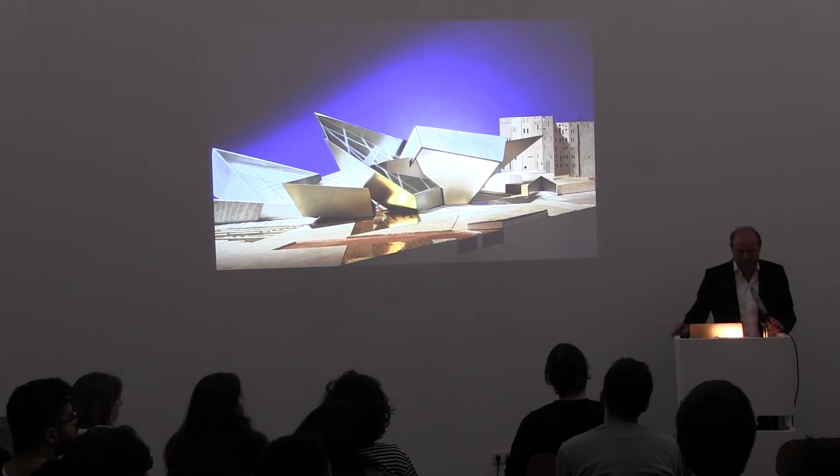Since I studied at Columbia, I studied with Hani Rashid, Greg Lynn, and Jesse Reiser, basically all experimental architects. We did movies, we started with Maya and scripting already at this time. What was very interesting is that Jesse Reiser at this time was a very experimental architect, considered a digital architect, but he couldn't even send an email.

We did this project in Denver, so that's what I modeled. We basically modeled everything by hand first, we did wax models, and this is what I really learned there—architecture is still an art where you sculpt, where you model, and where your eye is important. Whatever you create with a computer, through scripting, through generating by accident, you should always trust your eye and ask: is it good, or is it good because the computer generated it, or because you like it? That's really what I learned there.

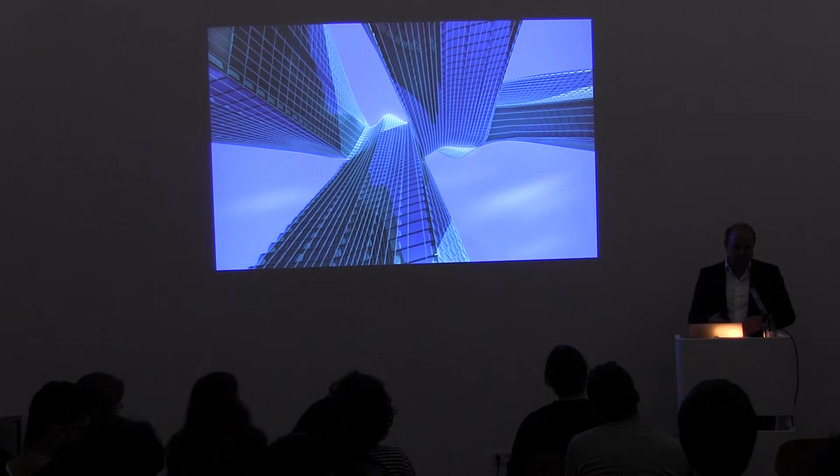So I really encourage everyone to think about modeling, about the basic art. Since Staedel is an art school, you have a lot of different topics, and I think this is a very good thing to keep in mind.

This was very interesting, working with United Architects, with Ben van Berkel, Greg Lynn, Jesse, FOA—like all the people were together. You'd think that highly talented people create amazing design, but this was the outcome, which was, I think, for us... That's also a topic—you really have to be able to work together.

But this shows the Angewandte is a really experimental school. I don't know if someone has been there recently—they built something completely different, just a small renovation and a small extension. And this, I think, is very sad.

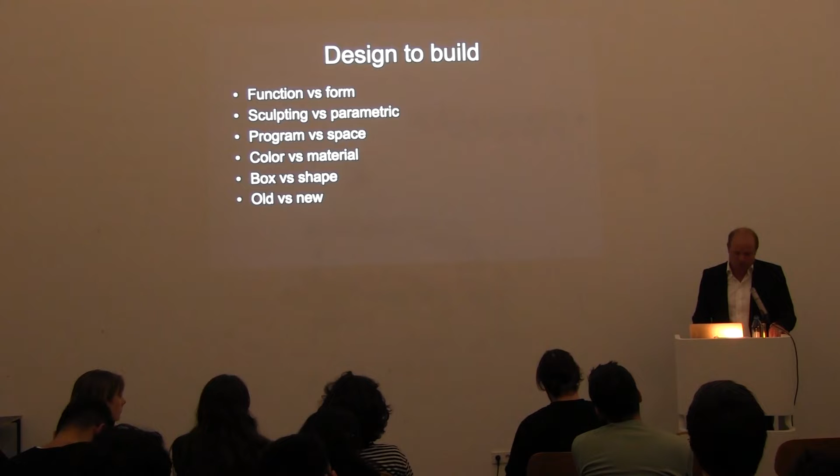So I'm going to show a few projects. The first one is in Russia, outside Moscow, in the former capital of Russia. It has 47 churches and nothing else, and it's a UNESCO World Heritage Site. It's like Rothenburg ob der Tauber here in Germany, and nothing modern has been built there.

So the client wanted something traditionally small, and we had a more conservative building, then we also decided to bring a landscape. It's a sports center—he wants to bring tourists to his hotel. We showed it to the governor, who was an old communist governor still, and to UNESCO World Heritage, and everyone went for the new project. This was amazing to see people used to traditional buildings suddenly go for this, skipping basically one level in architecture, the modernist era in between.

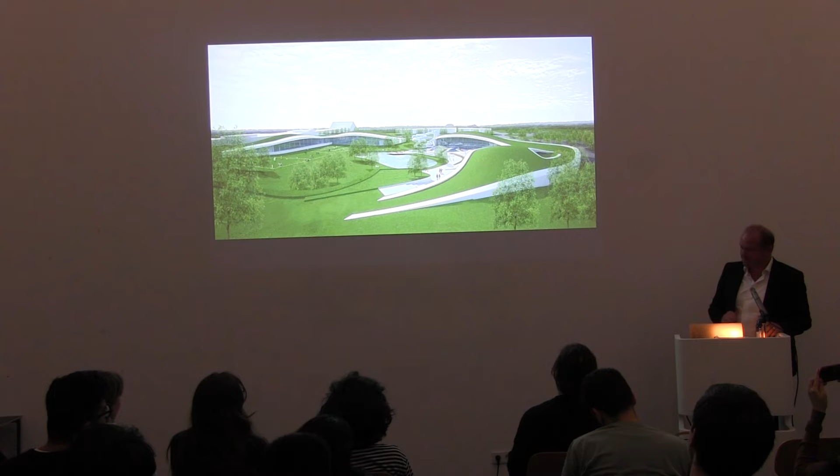This is a sports center, a spa area for the old hotel. It's all in the landscape, all walls are tilting, nothing straight, which is also not the best for a sports center, but the client really loved it.

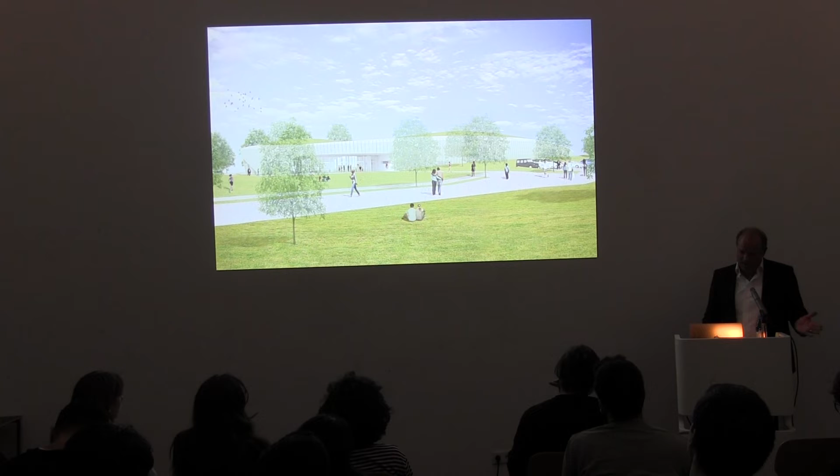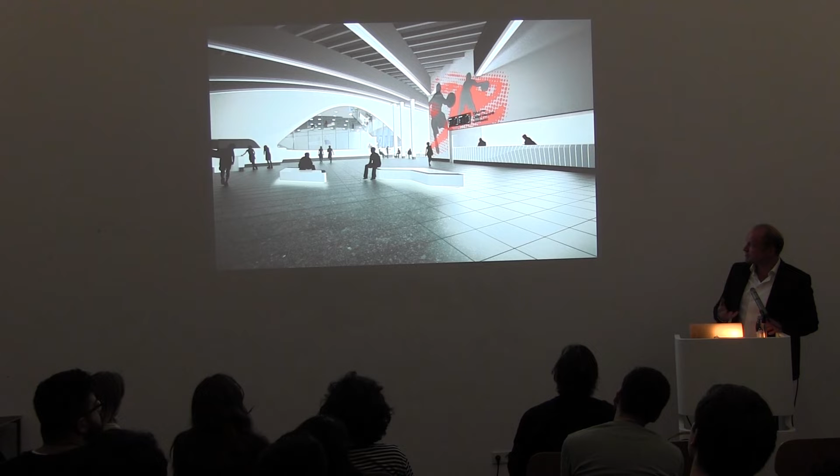The interior was also quite reduced, a lot of shape and form, and everything was modeled and shaped like the regular models we did.

Then Putin got interested, so we had to put judo in. They got funding from the state, so we had different sports, and we also had to introduce a VIP area.

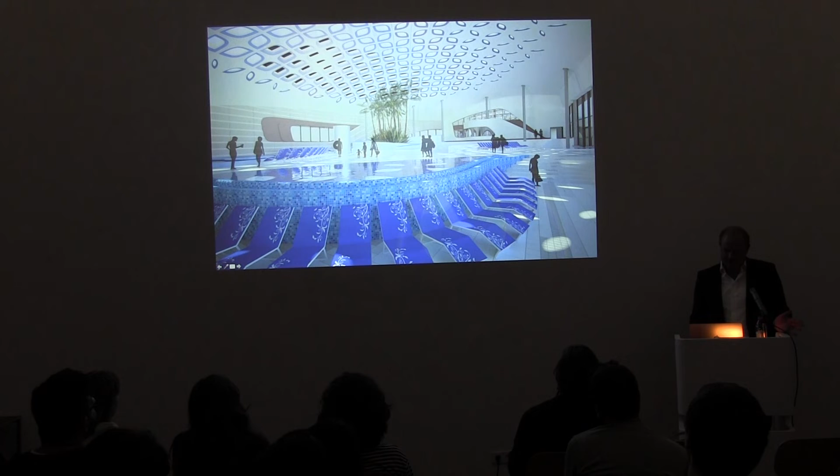This is the pool area. We have a ceiling which resembles their traditional colors, the flowers. The ceiling is also in parametric design—it opens up and closes, and basically covers the whole thing, also for acoustic reasons.

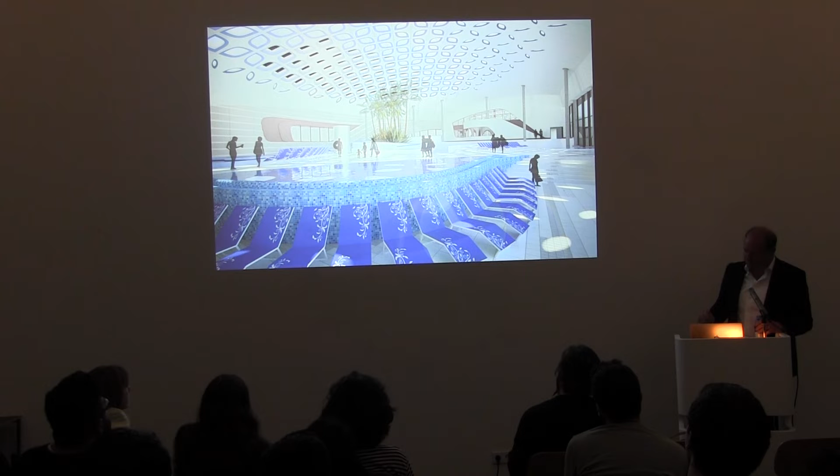The building is currently underway, you can see it here. This is mostly snow in the winter, and we are hoping to get funding. The embargo has stopped the construction right now, but we hope it continues next year.

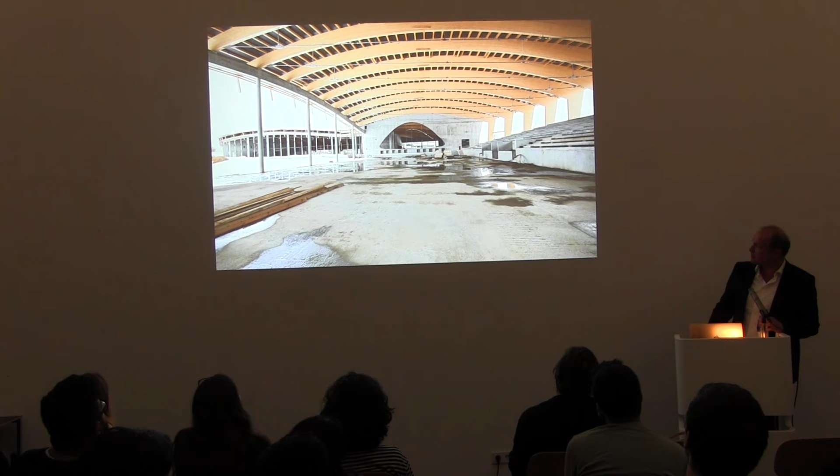This is the picture from the lobby, inside with the seating.

The next is a competition we won in Austria. It's also a pool, and we managed to hide the whole building in the landscape again, in the mountain. Since they have an immense snow load, we had really big beams, then we decided to reduce the span, but we didn't want to put columns, so we introduced a more sculptural column in the middle, reducing the span from 28 to 14 meters.

The structural engineer came with a beam every 5 meters, and we said no, we don't want to see any beams, we want to see a ceiling only. So we really started sculpting the ceiling, and of course it's a little bit inefficient in terms of structure, height and depth, and amount of material used, but the whole ceiling creates an amazing space inside. You get different heights, different acoustics and atmosphere, and it's hugely successful—people really love being there.

It's near Innsbruck, and of course each part was different to make. This was so successful we continued it also in the spa area. Here you see the floor plan—this is basically a rectangular building at the end.

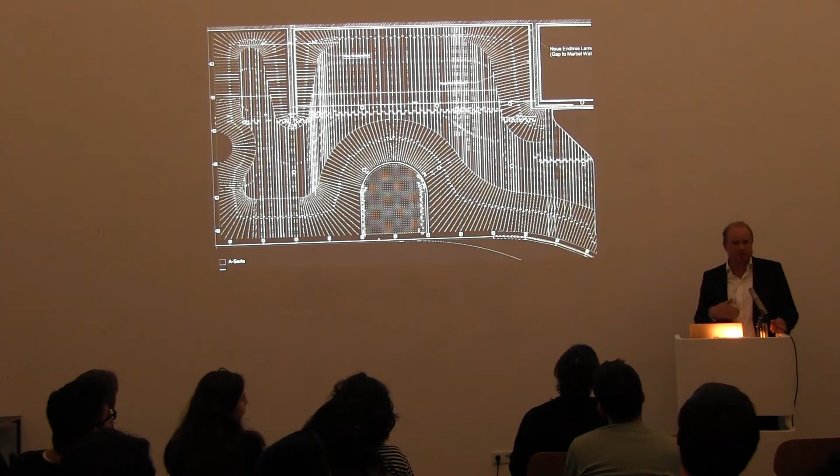So we took a local contractor and sat down with him and said, it's not so difficult. We give you a plan of a couple hundred pieces. We labeled each piece, had the MEP cuts in, had the notches, everything was done, and each one was different, of course. And he said, well, he just bought a CNC machine. I said, that's excellent for you to test it for the next few months.

So he was really happy about working with this, and this is how the rendering looks of the ceiling. You see the flow, you see the different densities. And he actually managed to build it, and also the price was quite cheap—about 80 euro per square meter, which is amazingly cheap for a work like this.

And this really works when you know about construction, when you know about design, when you know how to produce those drawings into construction drawings. And that's quite interesting. Since it worked there, everyone's really happy, and it's also good for the people in the office to see things going through finally, because you keep working on those things for ages.

Here are other images. We even had money left for backlit marble from Turkey, which was then very nice there for the whole atmosphere. And this was also for the lobby.

It's near the glacier, so we wanted to have the ice feeling, so we wanted icicles from the ceiling. The little dots are the icicles. They're arrayed in the field, so we applied force to the objects, and the field was arrayed in different steps. We needed to step because of MEP also, but there's also the entrance in here.

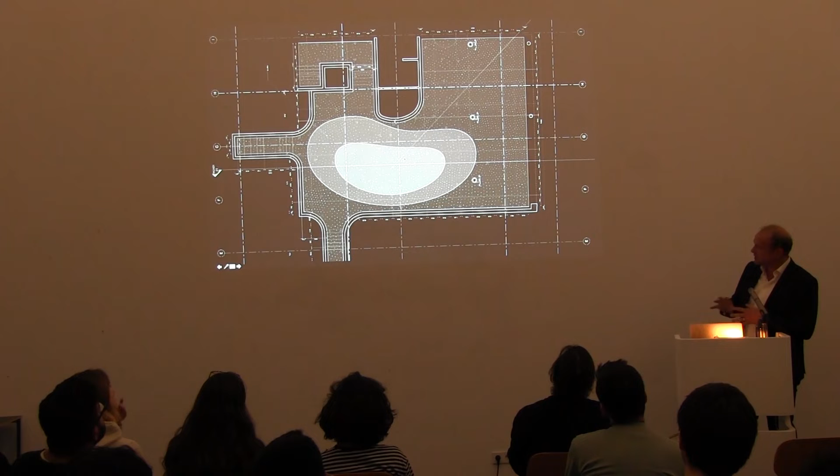And the question was how to make this a building. So we got the first offer. The first offer was 1.2 million euro. Then we sat down again with a company and basically drew every little stick, made rectangles, printed them out in full size and put them in the wall, and told them, you just mount it here, each point. And at the end, we came down to 60,000 euros.

So this was amazing, how you really need to transform the architecture into construction. And that's how the ceiling looks—it looks quite like icicles hanging from the ceiling.

And the same applied to the floor, also generated by a field with a computer. That's what I mean by trust the computer and trust your eye. We applied force, but at some point it looked too artificial, not handcrafted, so we deliberately put some mistakes into it and tried to make the whole floor pattern more hand sculpted. This was then also transformed with a one-to-one print on the floor.

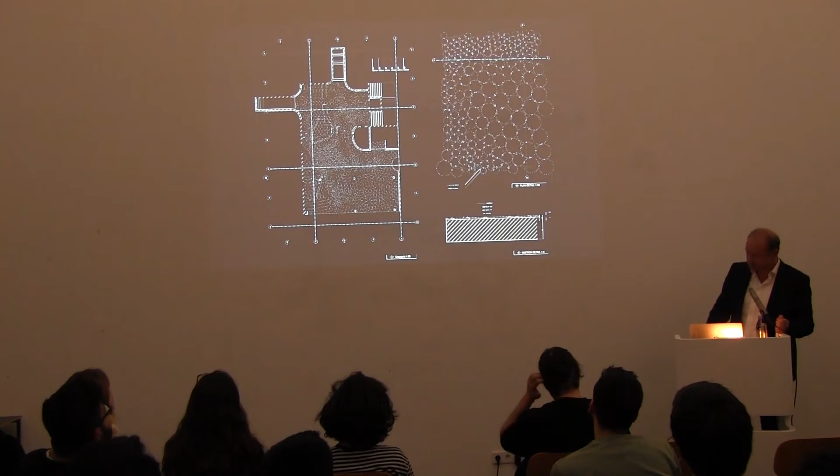And this was the rendering, and they actually managed to build the whole thing. Here you see the ceiling again.

The next one is a project I was mentioning before. Sometimes you just wait for ages—we got the commission in 2011, groundbreaking was last year. Actually this year in January. Building permission we got last year. It's a small project in a nature resort, very beautiful landscape. You wouldn't normally be allowed to build, but the zoning is from the 60s. It's a city in the south, and they don't want to spend any money.

So this was very hard, and we said, you have such a beautiful landscape, you need a nice pavilion. It's a very small building, and we said we don't do a building, we just do like the foggy landscape—a facade of just a few metal stripes. Wherever the entrance is, we pinch them up. Wherever we need ventilation, we twist them, like what has been done several times. And at the end, wherever you need a window, you dissolve them.

Dissolving was actually the biggest problem with the material, because you just can't go to nothing. So we just twisted and rotated them so it looks like they would dissolve at this point. And the whole elevation looks like this—this is the elevation of the building, wrapped around the whole building.

Then we presented this to a very conservative city council, and everyone loved it, which is amazing, because you really have to prepare people how to see something they haven't seen before. The only comment was, do the corners need to be round? That's expensive—not talking about the facade or anything, which is really expensive.

And those are the construction drawings where we have to really manage to transform what you see here into construction drawings on the site. The lamellas are twisting, the fixtures, and you need the gap for cleaning, everything, so this is quite intense in terms of work. This was done quite fast, and then you spend years doing this.

And this is on the polar circle, which is currently minus 20 degrees there and snow. It's an area where they get gas out of the ground, and no one wants to live there, so they have to produce infrastructure, sports centers, theaters, ice hockey rinks, swimming pools, all this.

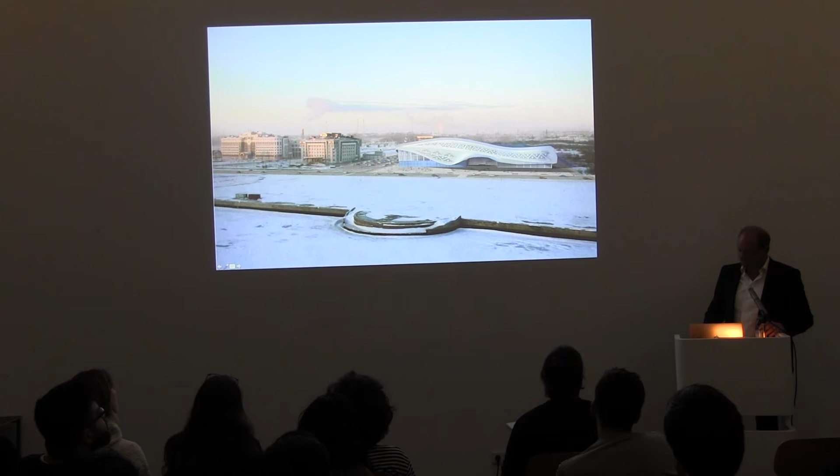And you see this is the buildings they do currently, and we did a building which is a very standard building, like this is the inside. You cannot buy anything there. You have to bring everything by train or by truck or by plane there. So we have a very standard steel building inside. This is all prefab like any other factory.

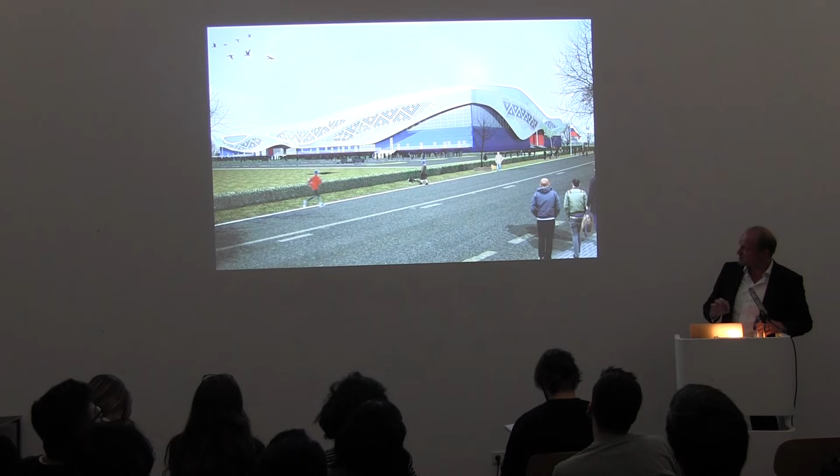So what we did is really have a skin around the building, and the pattern is scripted along depending where openings are, where VIP is, where the entrance is, and also at night. The night image was very important, and which also sold this project to the governor, because it's mostly dark there. And then at night you really only see the lit skin around, like a scarf around the building.

And they actually started construction. That's a picture of the summer. Here you see all the steel beams, and then they put the cladding and then the skin around.

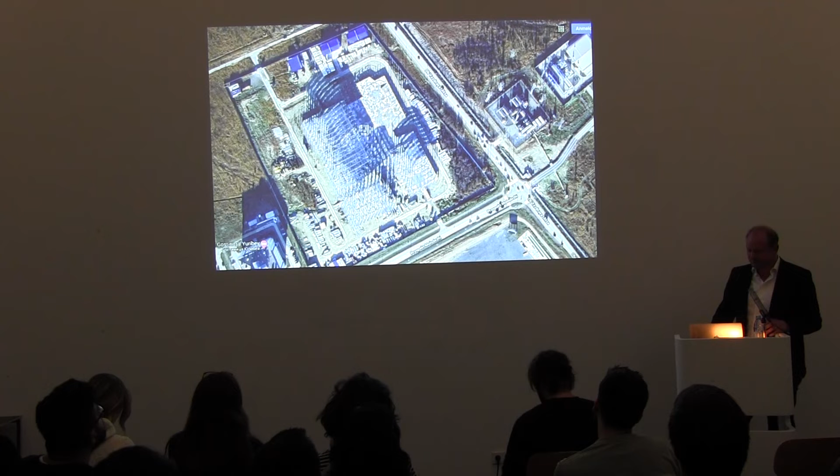One of the main projects of the office is a box, basically. It doesn't look like a box, but we sold it as a box. We got a commission. A colleague of mine started with an extension of this.

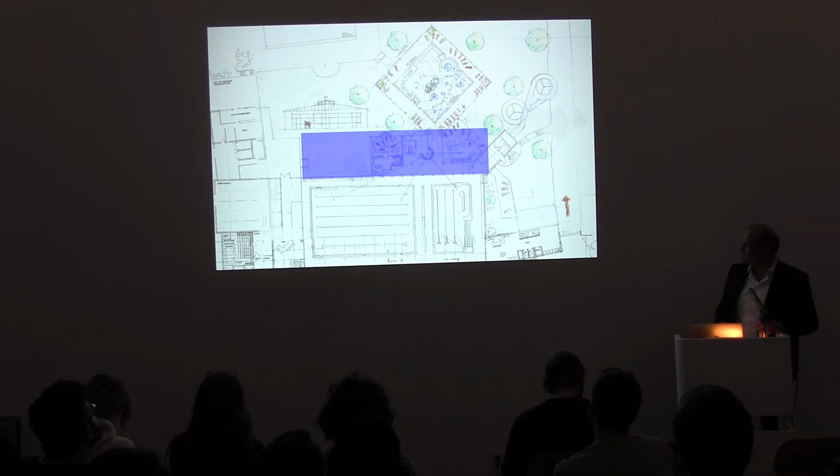This is an existing pool, and you see it's done in a modernist way. And we said, why don't you just make a simple box in front? Just put a box and don't spend all the money, but make the box beautiful. And we argued, this is the existing structure, this will stay.

The existing structure is quite dark, and we said make a box that's much bigger, so that you get light into the building. Budget was around 14 million at this time.

Then we said, don't put columns at the end, put columns in the middle, and hang the existing structure to the new one. But don't put many columns, just put columns like a tree, bigger ones.

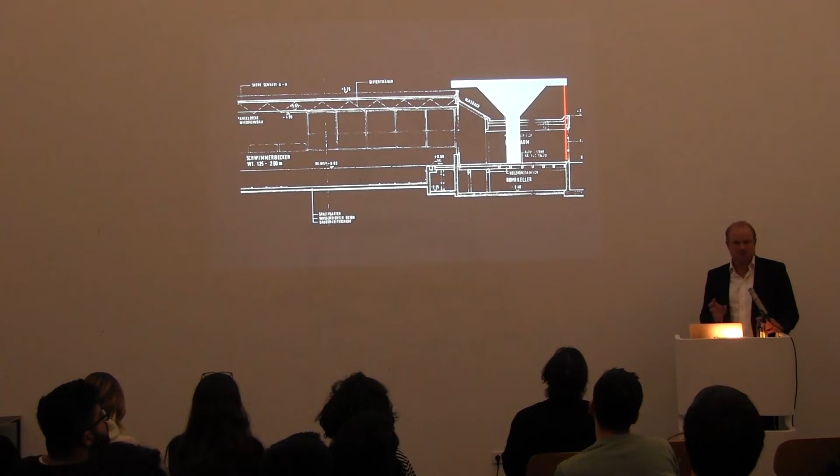And this project is in a nice park. There's old trees, 50, 60 years old. And then we did the floor plan, and the floor plan is almost a box.

We just tweaked it a little bit. It's totally straight to the connecting building. And of course everything could be argued, because here you want to be in a pavilion looking out to the landscape. Here you have an entrance, so you tweak in, and here you see the position of the trees.

So we put the trees, and you see the size of the trees, and then we said, wouldn't it be nice if the trees grow together at the top? And then the box evolved in a more and more complex way.

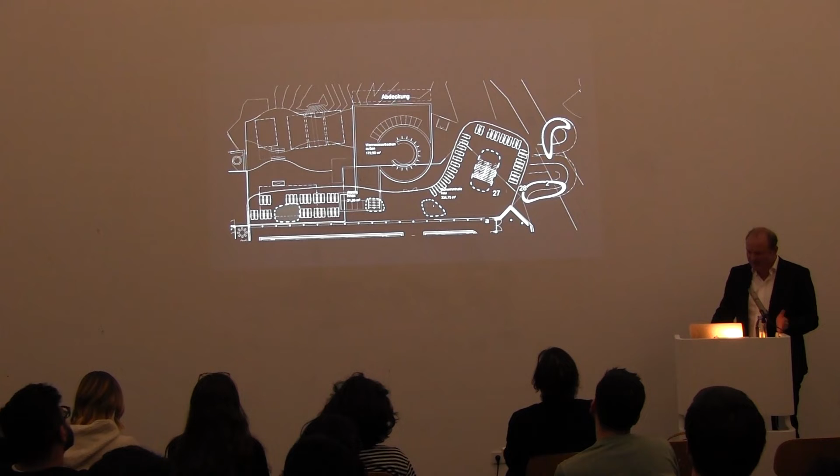You see the plan changed. It was really step-by-step, which was very important with the client, that he was really educated about this building. And then we came through, and then we did the presentation and presented this thing to him.

And then he said, well, we cannot pay for this, this is impossible. And we explained it's nicer, and he said, of course, it's much better than what he expected. And then he agreed.

He called the mayor, he called his board, and now we're actually in the midst of construction. You see, we have 3 trees here. And the steel structure is connecting and supporting the new and the old roof.

This is the inside. What is very interesting is also when you work with consultants like MEP or structural engineers. The structural engineer asked how he should calculate this, so he started, and he got totally into it. The tubes are 160 millimeter diameter. After two months he came and said he managed to reduce them to 112. I said, let's check it, and then the whole building looked so flimsy, we lost the whole shape.

This is also when a building looks too engineered, it looks like an engineering building. We said no, we want 160, but he said it's a waste of material. We said it's not about the material cost, it's about the space. We want to create a surface out of pipes.

You see it here too, once you start reducing the diameter, that's the back and forth of engineering, and then you lose the whole shape. This was an incredible difference from just a few centimeters. That's what I love about this project, that we are totally overstructured, but the space needs it.

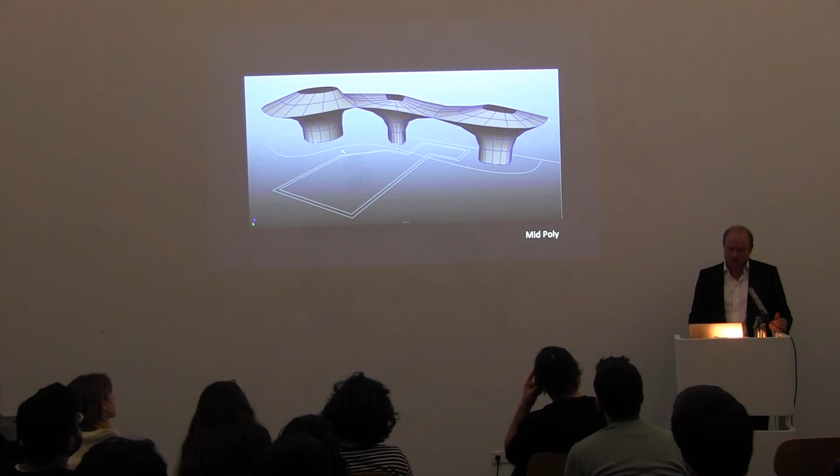That's what I'm talking about with modeling. The computer does a lot of work, but then you have to trust your eye, and here there are some issues. So we started reducing the amount, did subdivisions, and then really started modeling.

Suddenly we have a skin, which we applied with a regular grid, and the grid follows the knots, and the knots give the curvature to the pipe. The whole thing looks unorganized, but it's a pretty organized system. It's also modeled—that's what I'm talking about. Modeling with the computer generates the shape, but you always have to control it with your eye.

Here you see how it was tracing the splines. Of course then we had the issues of spline versus arc. This is quite familiar sometimes—splines really don't work everywhere. We value engineered this; you see one color is spline, the other is arc, and we managed to make them quite similar.

We gave everything to the steel company. We have 950 knots, and each one has to be welded four times, so that's quite a bit of welding. There are the facade columns, and the structural engineer still wanted some vertical columns to connect the top shell with the bottom shell so the load can transfer. We introduced the least amount necessary, and the edge to hold the facade and the existing building.

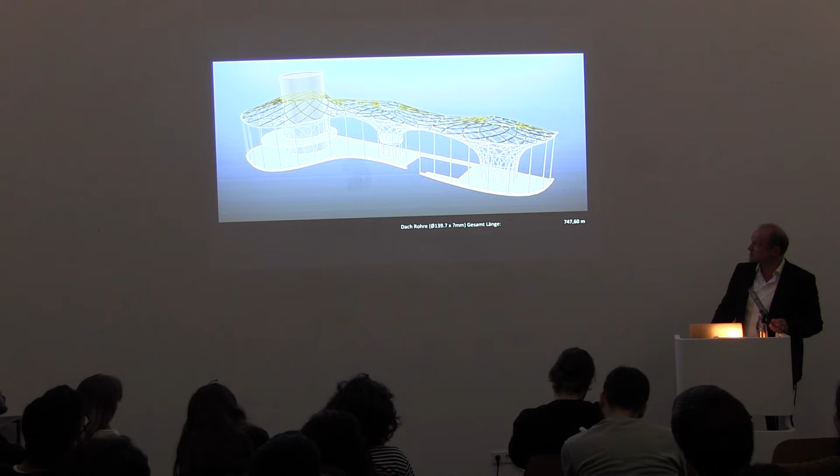It was basically done in two parts. This is the steel company—the whole thing was bent in Holland. There's a steel bending company that can actually bend splines, we found out later. We had transformed everything into arcs, and then they said, oh, you could have given us splines too. So we basically wasted a month value engineering this whole thing.

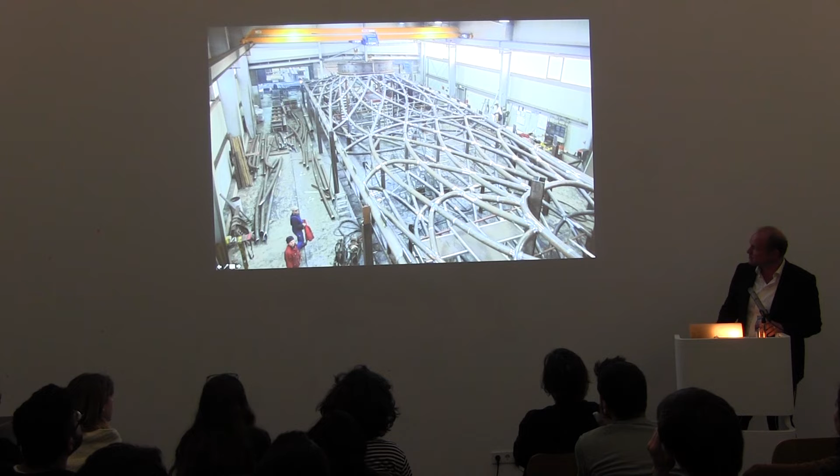But you see there's a very smooth curvature going through. This is the top part, welded together here. They had it in parts, and those parts were brought to the construction site and put up together. This is just recently—each object is basically an object on its own.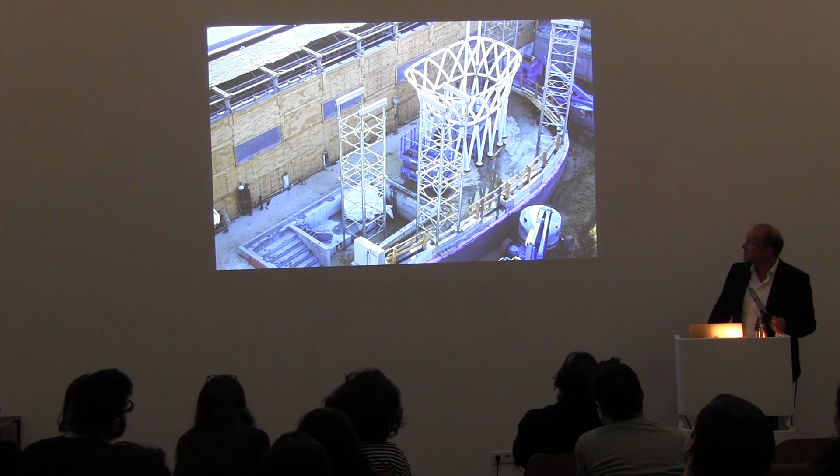Here you have a different function, a different program—that's why there are no cross columns. This is the second tree. This is one of the roof parts; they put it together on the parking lot, then got a really big crane and started lifting it over. Here you see little things like edge beams and little sticks for the roof cladding.

What was really amazing is that usually when you're on a construction site dealing with companies, they all say, we can't do this. But with this design, the steel company didn't bother about us being late with drawings or anything—they really wanted to produce this building. That's what I also like about making this kind of architecture real: people are really engaged, because they might only do this once in their company's history, and they were really engaged in this whole project.

So the whole roof was lifted over, and it fit. Here you see the joints, and everything is just like in the computer model—every single stick is just like in the computer model, and that's really amazing. Of course those sticks are not modeled by hand; this is all done by scripting, using Grasshopper.

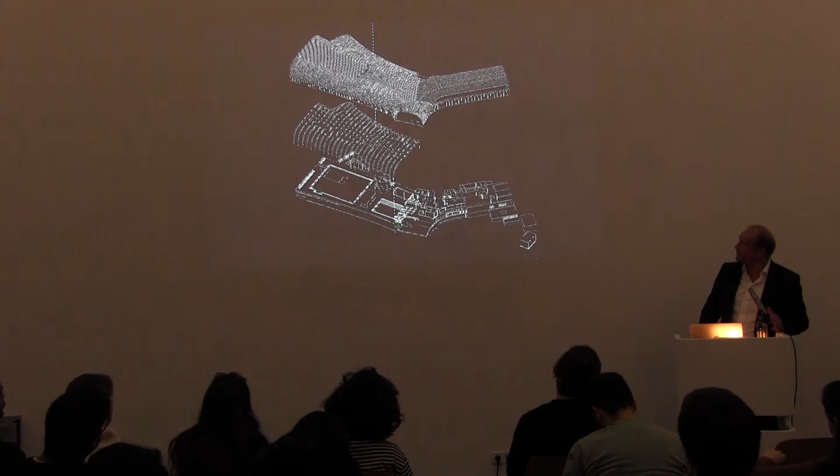We have a layer of cladding, a layer of timber, and inside we wanted over-structured beams so that the beams create the shape. I think that's quite important in our design—the space inside is not pure structure or space, but the space becomes the structure. At some point the beams are over-dimensioned in the middle, but this was very important for the shape and direction of the building.

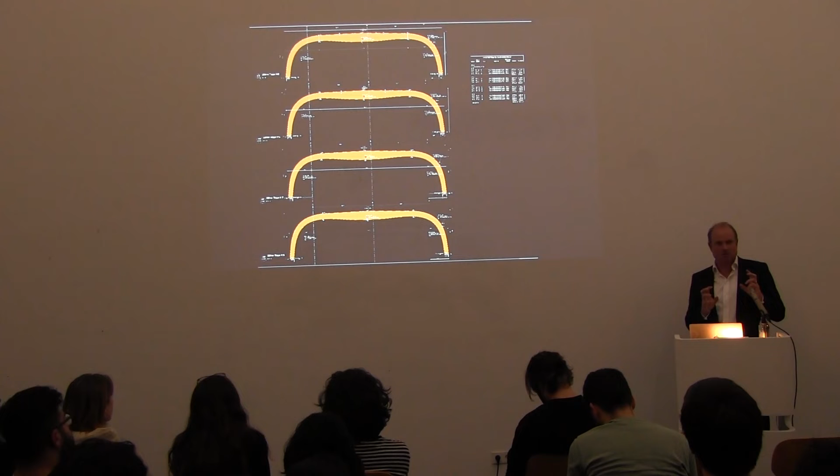In this project each beam is different, and they're quite big. Like in the small project in Austria you could see this, but those beams are 30 meters long, and each one has to be laminated—that means the glue lam is being used for a week just for one piece. So we always had to make 4 pieces the same, meaning we had to adjust between the shape and the construction. You basically take over the little cuts away, add a bit to each one, then cut away at the end again, so you always use the same shapes.

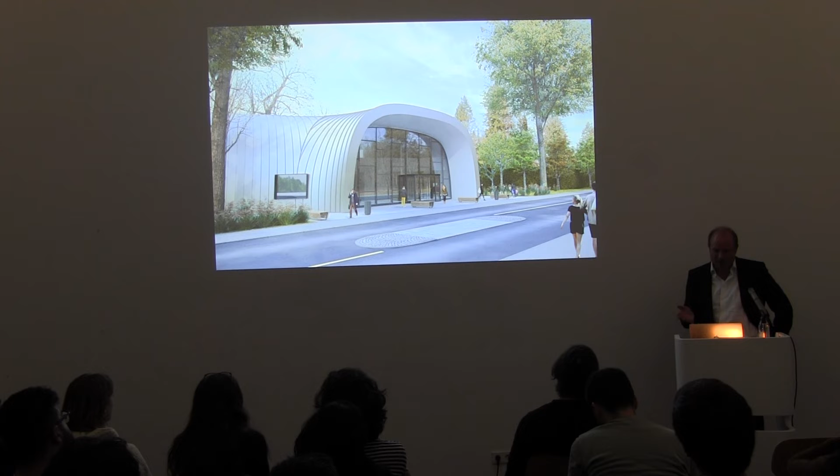This is currently being built, and that's also a view from the entrance. It's in a beautiful park, and this also was a big discussion about budget—why can't we do a simple box? It's cheaper, but at the end it's not cheaper because most of the building is MEP anyway nowadays.

This was a small project also in the south. You see here it's a renovation project. The existing building was a medical treatment facility—like for mud treatment, not a hospital, but more like spa medical treatment. We basically knocked down the whole existing structure and built a city in there, a city with a space here, and each part gets its own room.

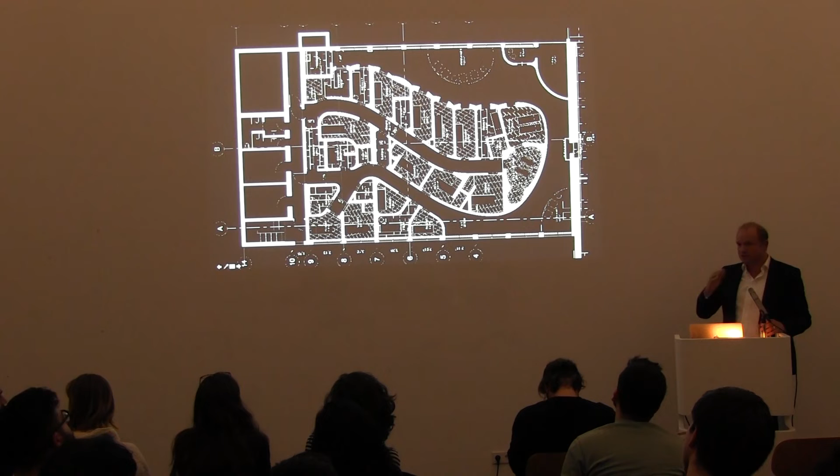We had 3-dimensional walls bulging in 2 ways, deforming the space in there. Since it's mud and wood, the left part is mud and the right one is more regular treatment, and we had this transformation between the 2 colors, between the 2 materials. This is also scripted, but also then done manually. The whole wall was done in an unrolled surface, and we had issue with the double curved patterns.

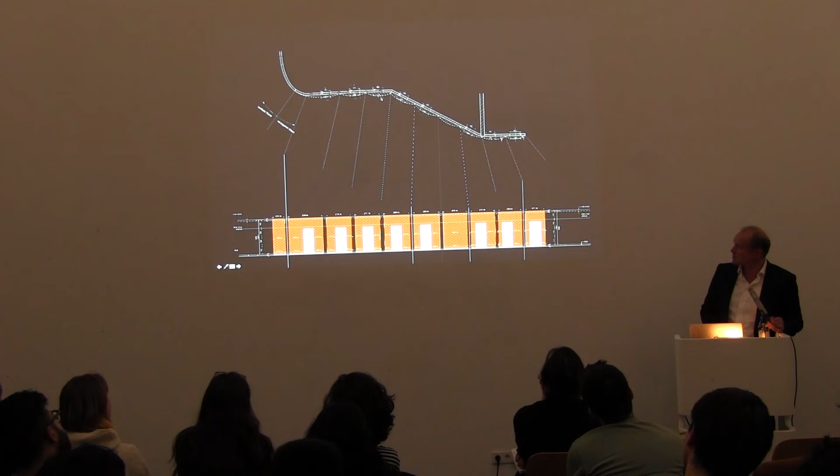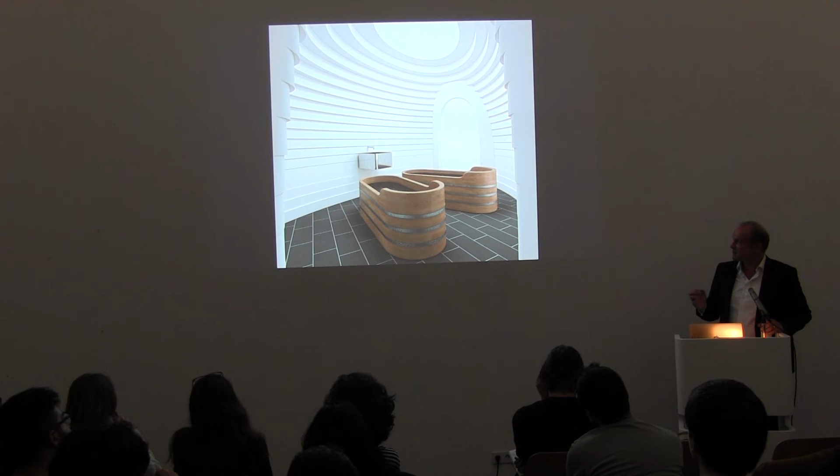And as you see, they all meet in the corner, and he did an amazing job drawing this with us. We had another room—this was the rendering. We wanted a very special room called the couples room, where 2 people can use it. It should be like a cave with special light in it. An issue was how do you build it, how do you pay for it—but this was actually quite simple.

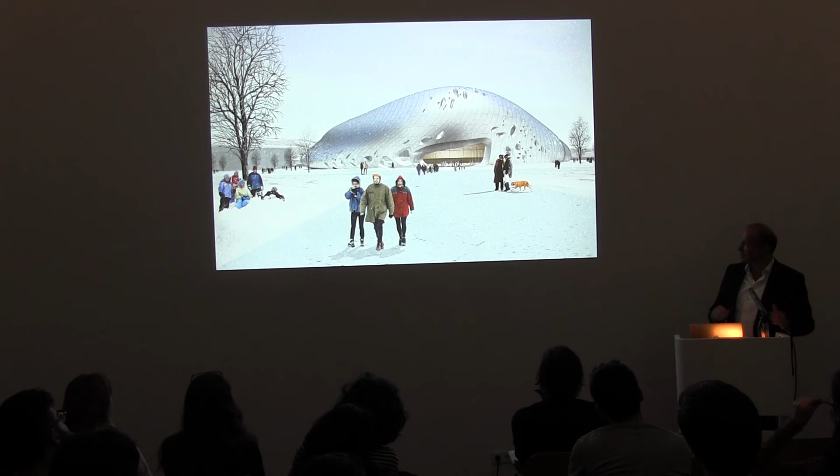The next project we didn't build, which we tried to push and push, is called the Platinum Arena. It's an ice arena in Russia, and at some point the client really said it's getting too expensive. He owns a platinum mine, but still he couldn't pay for it, he said. So we're currently reducing the design and going back to a more simple shape. But I hope to push this through, though we're still waiting for it.

Another project we took over from another architect. The client wasn't happy. We were in Lithuania, and we did a quick sketch at the airport. This is actually a sketch done before the building, because usually architects present sketches done after the building. It's on a very beautiful lake in Austria.

Amazing, no one could build there. All the houses are traditional, with a sloped roof, and if you build a flat roof you get drowned in the lake, I think. Our idea was to really have the mountains in the background as part of the building, and the building is very three-dimensional.

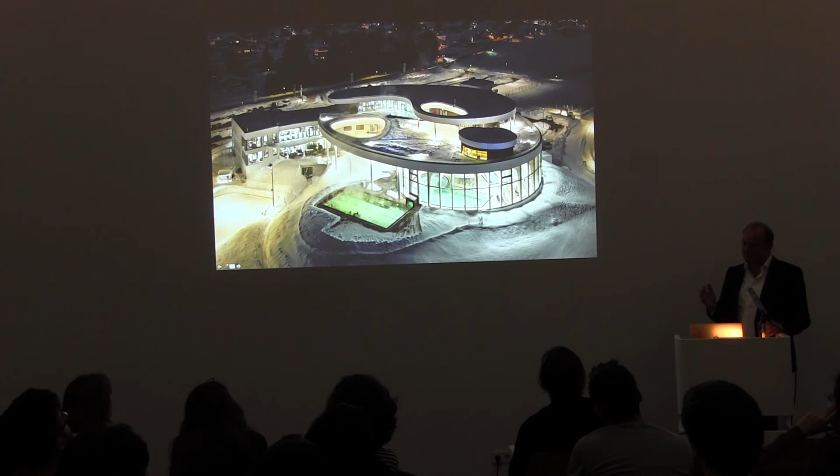Here you see the sketch transformed into the building. It has 3 levels, but each level connects to the next, and once you stand at the bottom, you see the next level. What's really amazing is when you look at the site, you basically have walls that are 1,000 meters tall around it. They are really amazing, and the building is like a puppet house within this whole landscape.

Those are the floor plans. The model was done through studying how does it go up, how does it go down, where do you see the landscape, and that's how all the openings were defined.

When you stand at the finished building, you're on the first level, but you see different levels above, different levels below, and always the mountain and the lake in the back. That's what I mean that the landscape becomes part of the building - it really becomes 1,000 meters tall. When you stand here, it's an amazing view.

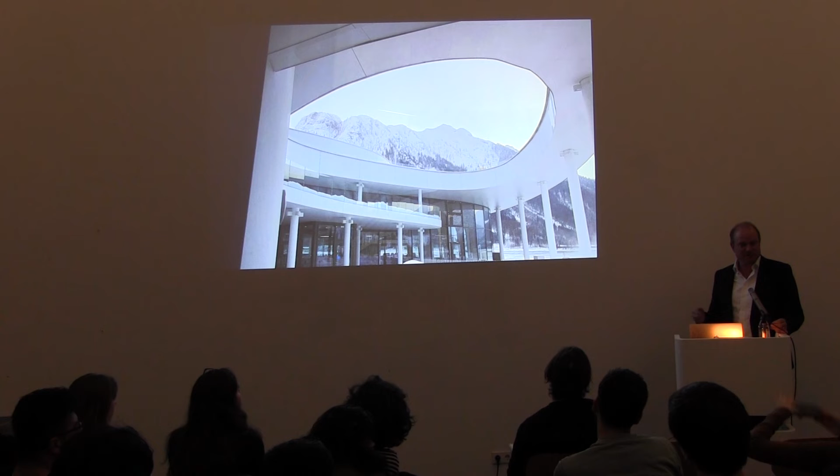If you drive by on Lake Achensee - this is publicly accessible, and it became the new town square. People have a cafe there, people meet the mayor there, and it's really amazing how this evolved into a public plaza. So it's much more than we imagined.

Here's views from up and down, from the rooftop to the terraces. The upper terrace is also quite beautiful in summer. We also had the view from the lake - it was important to have glass because you want to see out of the building. This looks almost like a modernist facade curved to the lake.

And this is the inside. The structure is held up by one column, which holds the whole building. Also the roof structure is shaped not in the structurally most useful way, but in a way that is sculpted. Here's the pool, and the inside is very open, a very bright space.

The back facade was really very complicated. We wanted to have floating discs, so this was basically a building that holds itself up. We started with patterns, tried to design in different software - how does it work, how does the pattern work. As you see, you can model it so the disk is floating, but what does it hold up? This was very, very painful.

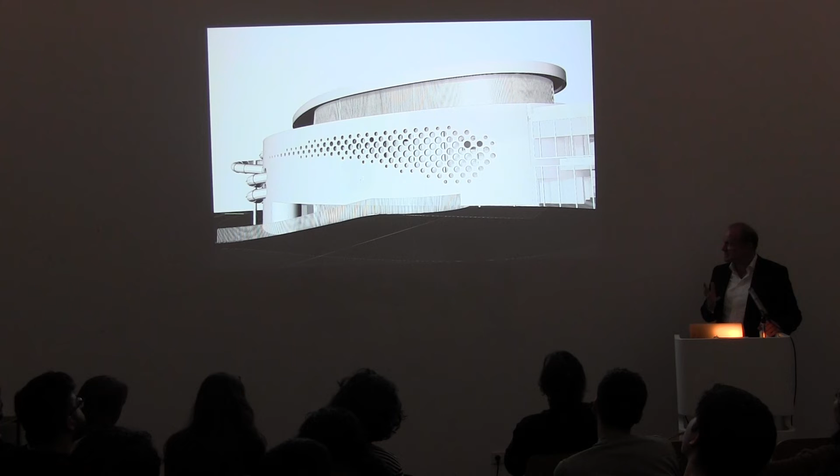Then we came back and inverted it. We said, let's just do a regular pattern, do scripting, and have the facade inverted. As you see, the result looked very sad and wasn't encouraging to continue with. That's when we tried to fight for the facade with the client. The building was almost too open, and we still didn't know how to build the facade.

And everyone said, what are you doing there?

We generated the facade again with a pattern, a little denser. We tried to connect them, which also didn't work, and then we decided to put a substructure behind. But the pattern work was quite intensive in our office, figuring out how to produce a pattern that looks good.

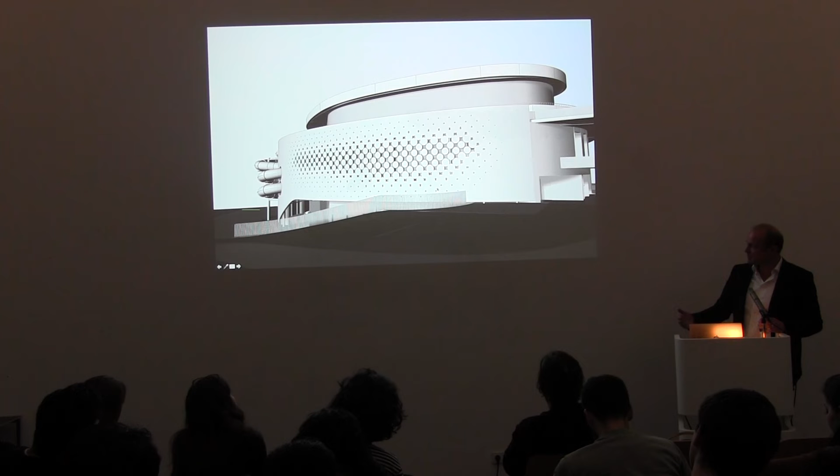So we used scripting, we used different modeling tools, and at some point here's one purely computer generated, and here's a pattern slightly modified by hand. So we really tried to combine what I mentioned at the beginning: the UI, the computer generating, and the modeling. The architect's ownership of his work should also be there.

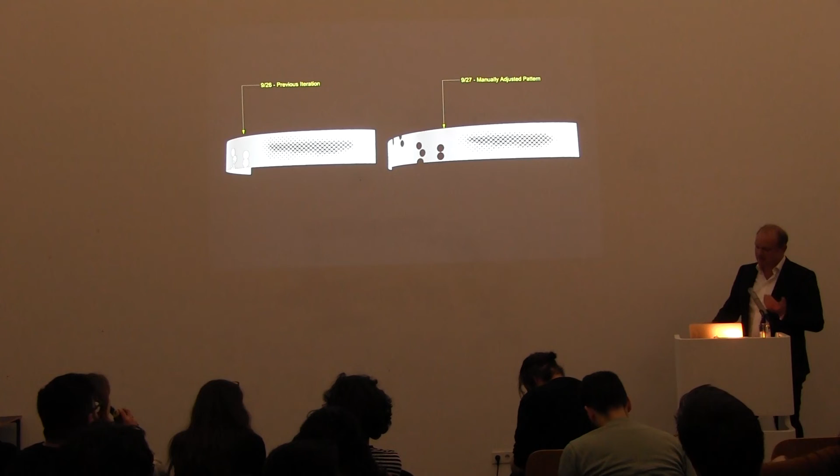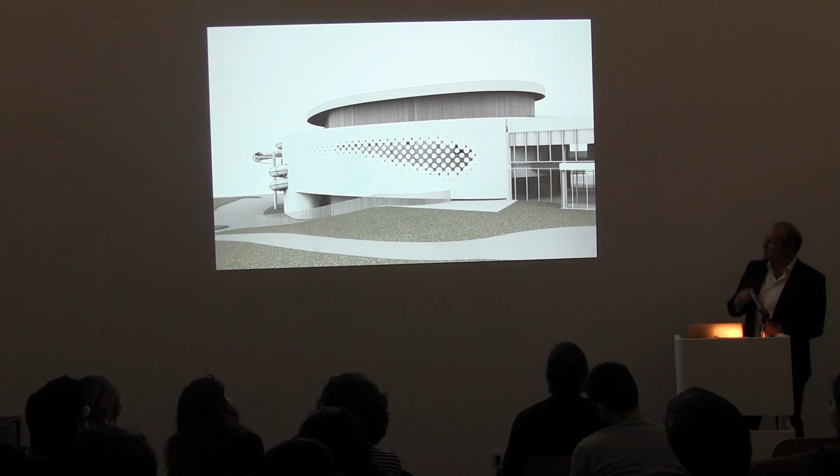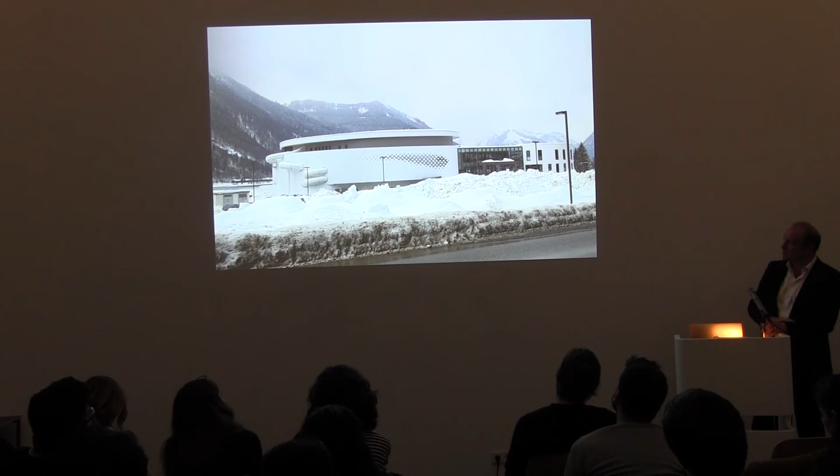So this was really transformed one-to-one. We have the sticks in the back, but the effect of floating discs is really there. And of course, a million cars drive by every year, and people really look at this building. We managed that the building is recognized without people knowing what it is. So when you drive by, you really see it floating.

These were different examples of how we tried to do it. And this is a close-up, which I usually don't show - I only show it here because people... this is from the back. But that's only pictures to show how we did it. And that's a recent image from the winter with the 3 dimensions.

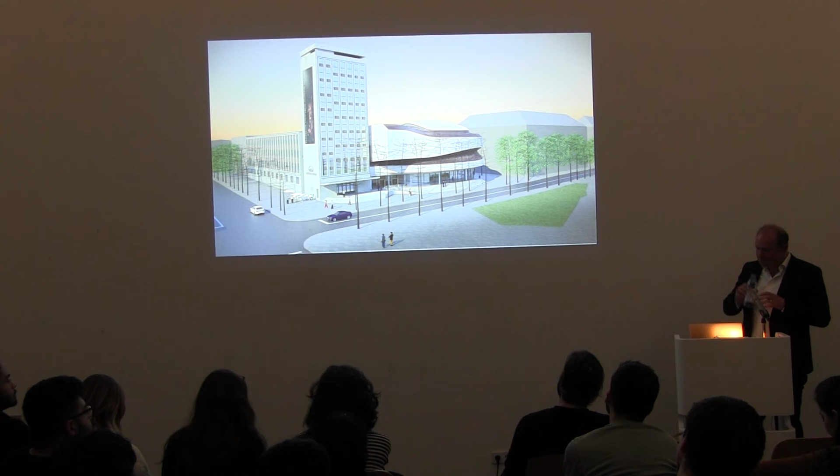The next project is what I talked about, old and new: the music theater in Klaipėda, Lithuania. The tower is an 80s Soviet tower with offices, and it used to have an 80s theater. They wanted to renovate the 80s theater and extend it, which didn't work space-wise, construction-wise, or aesthetically. So that's when we decided to knock down the existing building and build a new one.

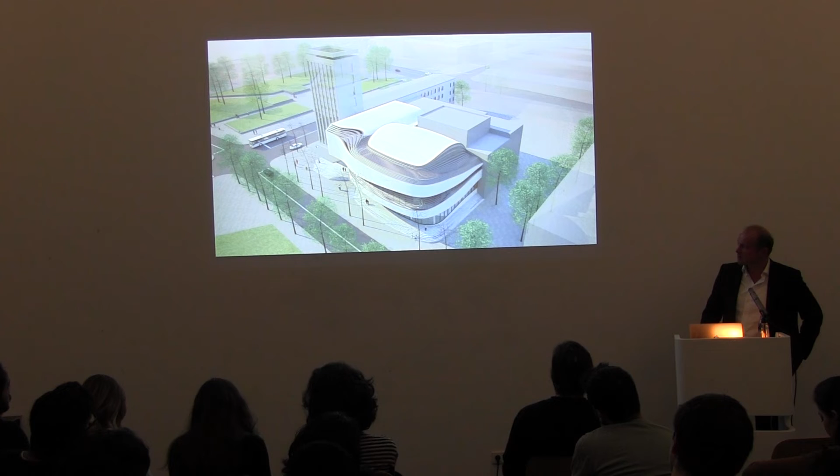And the design, of course, helped to convince the jury and the mayor. What's very interesting here is after winning the competition, the design had to follow all the rules. We got the acoustic consultant, we got the site limit. The client always wanted 700 seats. We said we could make it smaller, looking better, but he insisted on 700 seats, and then the red line is the sight line. So you see it's all very packed there.

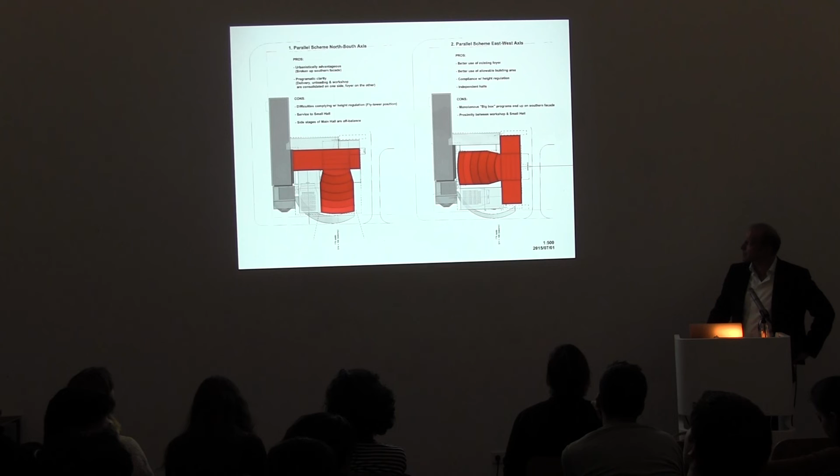So we tried different options to orient the theater, and then decided on orientation towards the front with a foyer below. Of course it's the best because you want to look at the river. Here you see the lobby, the building above.

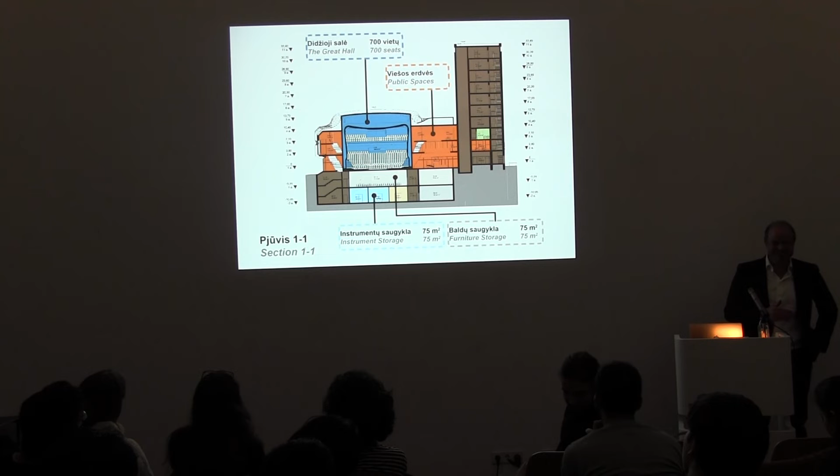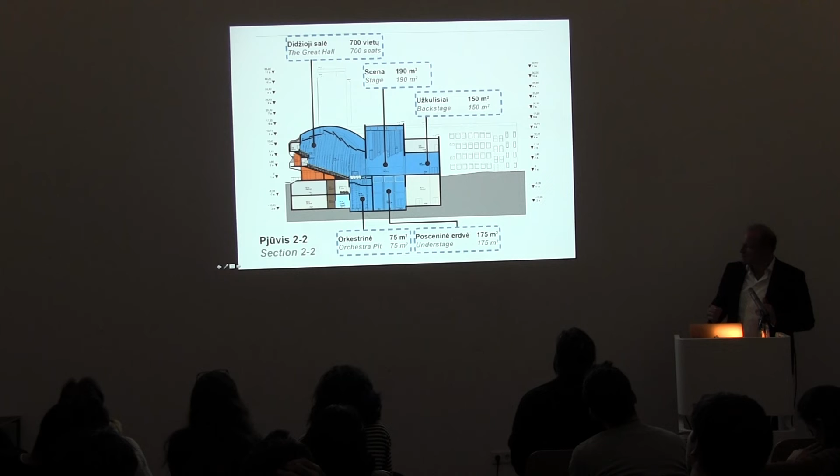You need the sight lines, the proscenium, you need the backstage, and everything is pretty much set. But we still managed to create an exciting space inside, and also the lobby, how you go up, how you enter the spaces. This is basically theater stage technology in the back, which is totally standard - delivery truck, all this has to be taken into account there.

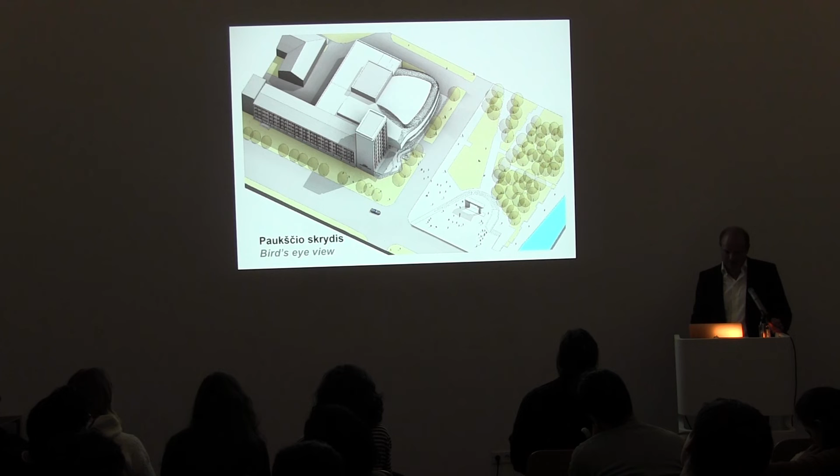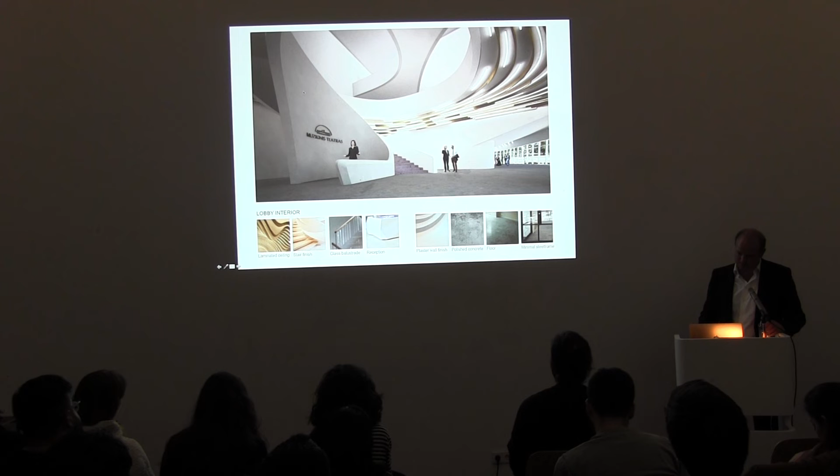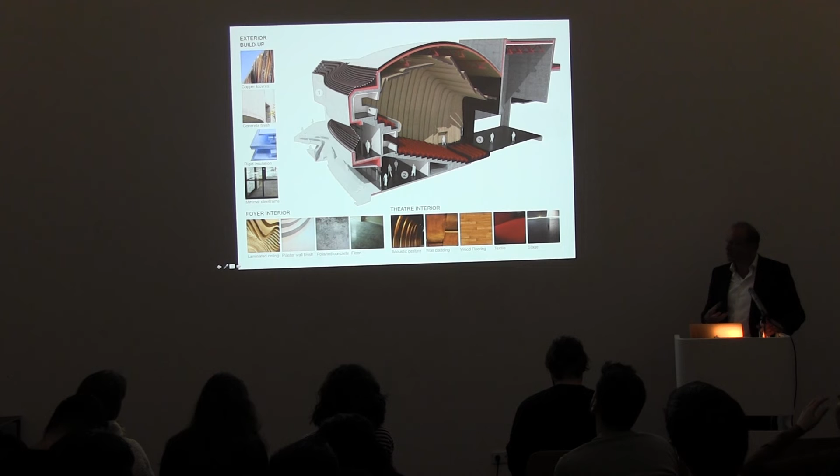And here you see the structure, the timber cladding with a perforation for acoustics, the seating arrangement, the balconies. Then of course in the middle they need the television space, which also needs to be very prominent, so they take away the best space there. And we designed all the material and lobby space again.

And this is then the auditorium, and what's actually very nice is it's a very dense auditorium. We have 700 seats, but they're all very close. Before they used to be 35 meters long, and now they're all below 27, 28 meters from the auditorium. So it became quite wide, and that's currently under construction there.

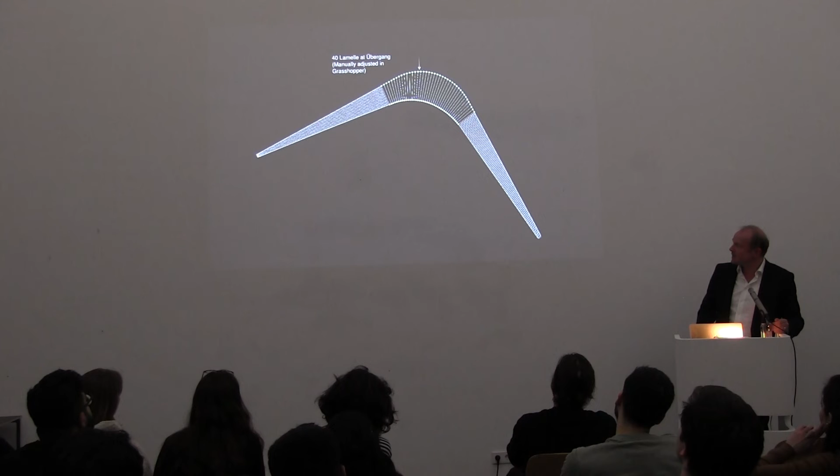This is the cladding, which is also prefab, because you cannot really do it on site. That's the way how we do the cladding, each part. Here it's all okay, but then you get a curve and you have a transition - how do you do the transition point?

We did it also in Grasshopper in scripting, but then at some point you really can tell differences, and that's where we started - you see it here and here, where we also started to go back and fix each one manually. So this was quite important, to always trust your eye and really follow what you learned as an architect. Here you see all the different elements that are currently sent out to construction.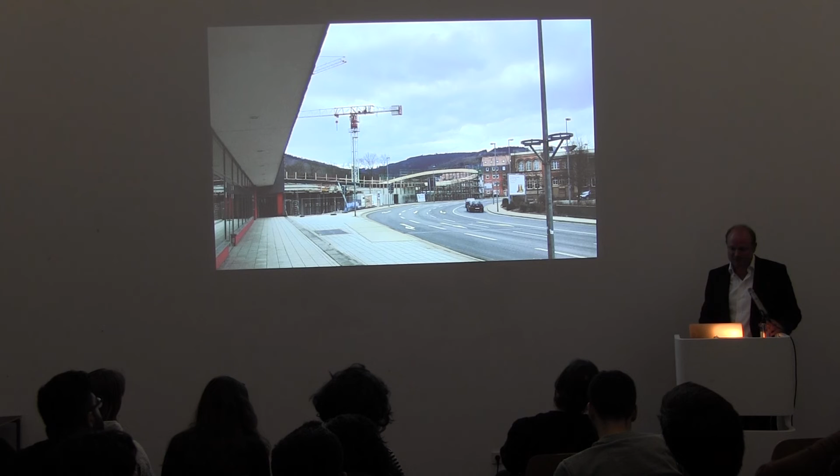Here you see the shape of the building, double curved timber, quite good actually, and this is currently being done. Roof is hopefully finished also next month, and that's how it looks when it's finished.

One more project about sculpting is this. We won second prize in Lithuania, and it's a very sculpted, like almost from interior sculpted project. We started with simple triangles, put them together, and tried to make them a shape.

This is done in Maya, and this is really working like a sculptor. You have different polygons, different angles, different curves, and each one was sketched and shaped.

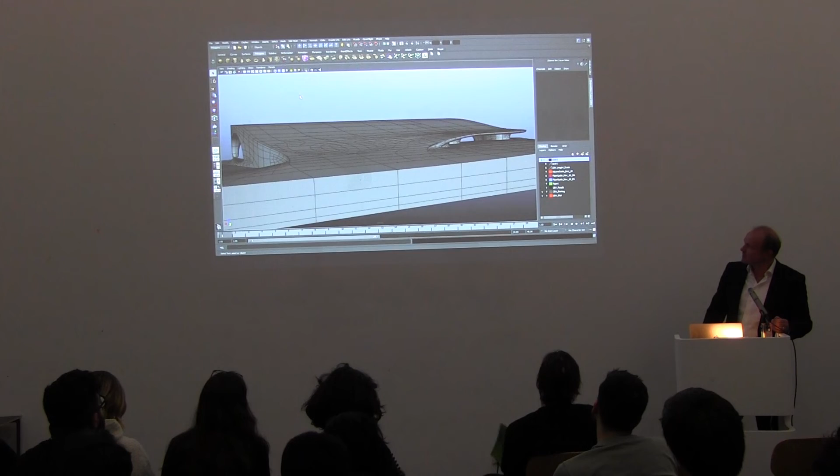Here you see parts of the model. And then, of course, brought into Rhino and cut and extruded, and then the building was finished. So it was quite a fast project, but highly modeled.

We only won second prize, unfortunately, because they were a little scared of the budget there. That's the problem in competitions sometimes, because you cannot really convince the client directly, because you have to go through a jury.

Here's the section. You see the staggering system of the topo lines. The whole thing is also in the ground. And view from outside, like the cave, like a cage on the inside.

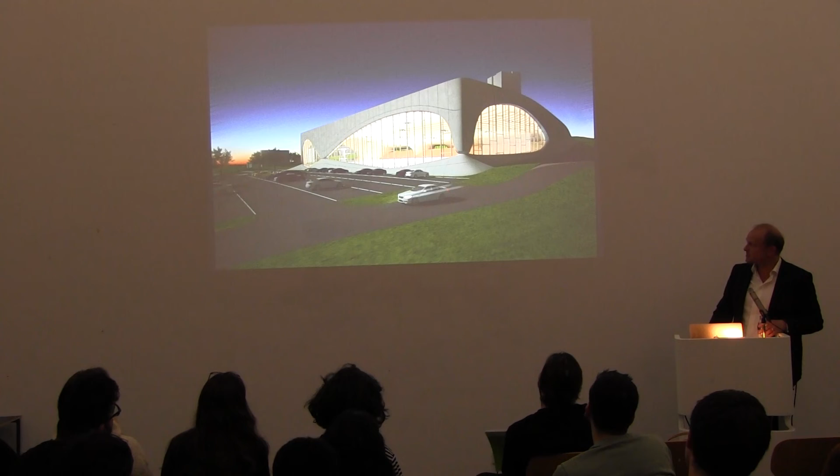Also in Bremen, we had a similar system. This is a public plaza between two buildings, and the idea was to bring together those buildings with raindrops, and they're intersecting - you see it on the plan.

And then we tried to model everything and landscape it. The city came, they said they want more green. We really wanted just an architectural square. They said it's too architectural.

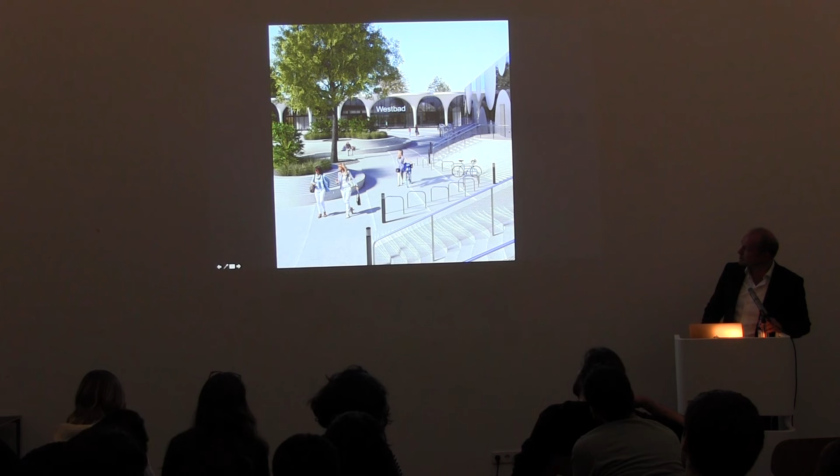We put in more plants, but then all the topo lines become projects on its own. They became benches, steps, escape stairs. Those were existing escape stairs we had to move in.

And also at night, how the light works - we didn't want big lights on the top. The escape stairs had to be lit, the existing buildings. And that's how the whole thing looked at night.

One project an alumni from here is working on, Eva actually, and she's working on this for almost 2 years. It's in Freiburg, and it's small pavilions. She worked on them all, did the design, and is pushing it through, and we are now in detail phase.

So there's a lot of small pavilions like this one, outdoor space this here. This is the existing building. And also this one - they also wanted a regular box extension, but we also convinced them, especially here's a hotel,

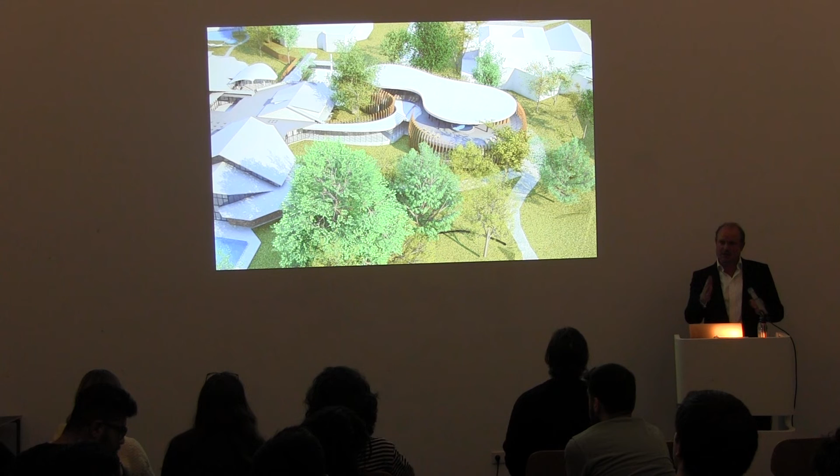once you look against a straight wall, you really look against the wall, but if you look against a curved pavilion, then your eye goes around the corner. So this helps to convince the neighbor to accept this building very close to his house.

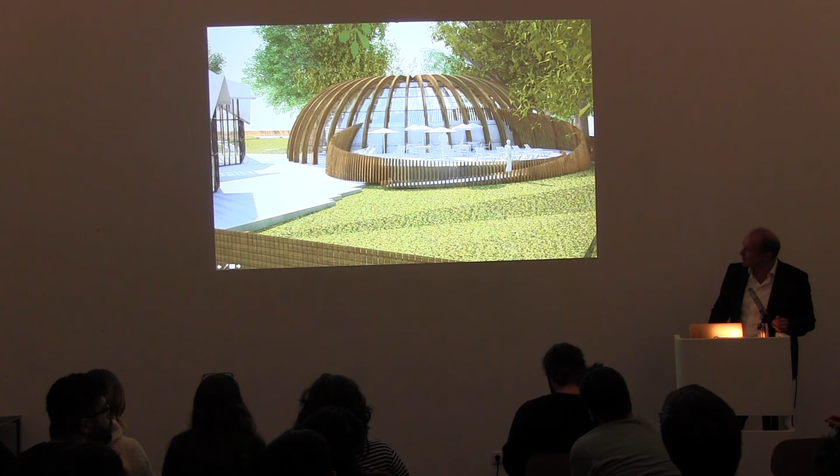And we also worked with the shape a lot, and also the material. This is in a park, and here you see all the timber structure on top. And there's a third pavilion, which will be built hopefully in 3 years, which is another small restaurant pavilion, also on the outside.

This is done in Russia. We did a quick design which is going to be built. The client asked us to help out with an arena in Rostov.

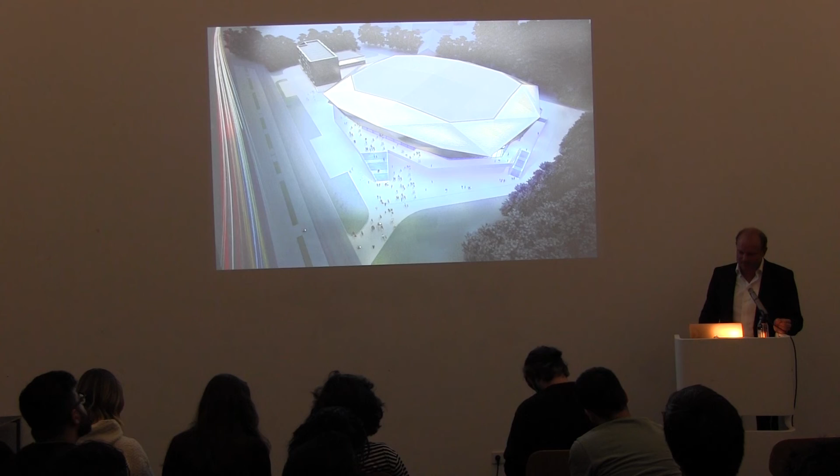Also the cladding here is designed in both parametric and handcrafted design.

Two more little projects I want to show, one also done by alumni from here. We had a commission for a very small learning pool, 8 million budget. We also tried to convince the client not just to do a wall and a roof, but to have a nice shape—you see it in the logo already. And this is basically the building.

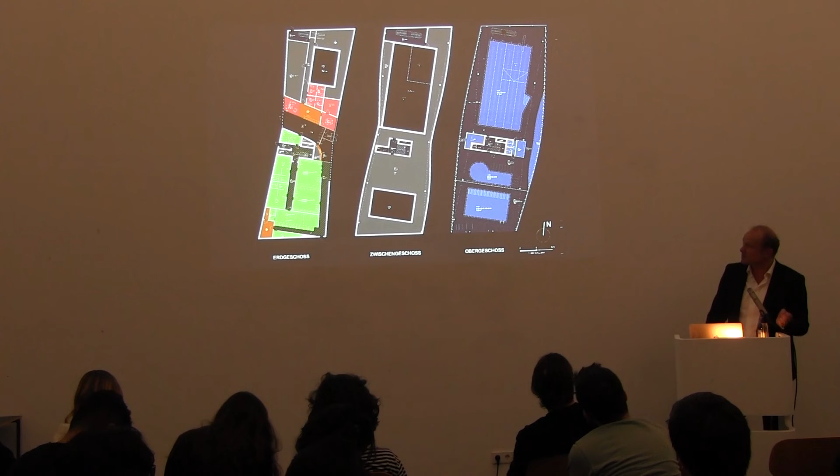This is the plan how we started: a rectangular building with a rectangular basement. We said we don't want the basement, and the plans became like this. The mayor said he couldn't decide, so I had to present it in city council, and the whole council voted for the building, for the budget extension and for the design itself. This is lovely when you work on a project and put all your design into it, and then the client, or the city council, says yes, we want to pay for this, we want to afford it.

We did a lot of model studies on how the shape looks and works. This is a lot of what we do in our office, basically studying shapes. And that's how the building will look.

You see the double curved facade, and that's the existing school building, with the pool elevated to the top. They wanted it on the ground floor, but we said it's nicer because you look out to the landscape, so we don't have a basement. You walk in, change, and go up to the pool, and it becomes a very nice pavilion in the landscape.

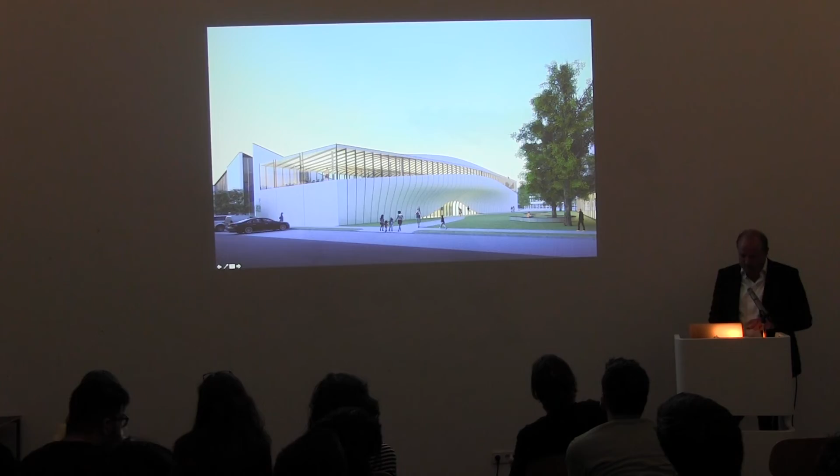The last project, the last one I want to show, is the project in Jianing. Thank you.

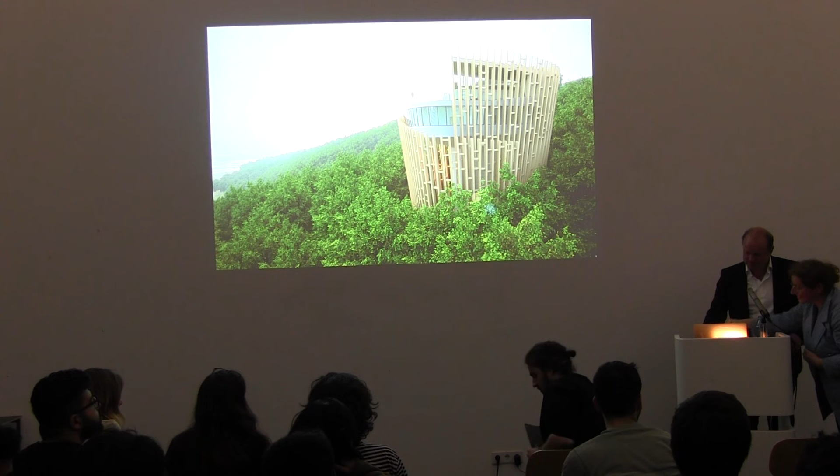I've recently been to China, and I worked with a client who asked, how do you work? I've seen what you do, but how does it work? So I said, well, first we should have a contract, and then we start working. And he said, yeah, but how do I know I like it? So I said, I'll design you a villa, and then we'll see.

So I came back a few weeks later with this design. He owns the whole mountain there, but he has no view because the trees are tall—this is one of the biggest bamboo forests in China. So I said, I'll design your house on the top.

He said, but we need some Chinese elements with it. So I said, well, there's a lot of bamboo and we can use it as a structure. This also helps the building, because it's not only the structural core with the elevator and stairs in the middle, but the shell around it gives privacy to each space and also helps create a pattern and relationship with nature.

This was very important to the client, and now he really wants to do a few more buildings—that's how we got into this market. It's very exciting; I met his family, I stayed at his father's house, he's 90 years old. It was really amazing how architecture and design, what you learn and what you did, combined with always trusting that you really do the experimental stuff, lets the client trust it after a while. He expected something far more traditional, like a villa, and I said, this is a villa, how a villa should look. And that's how he's now very much into the work, into developing new projects.

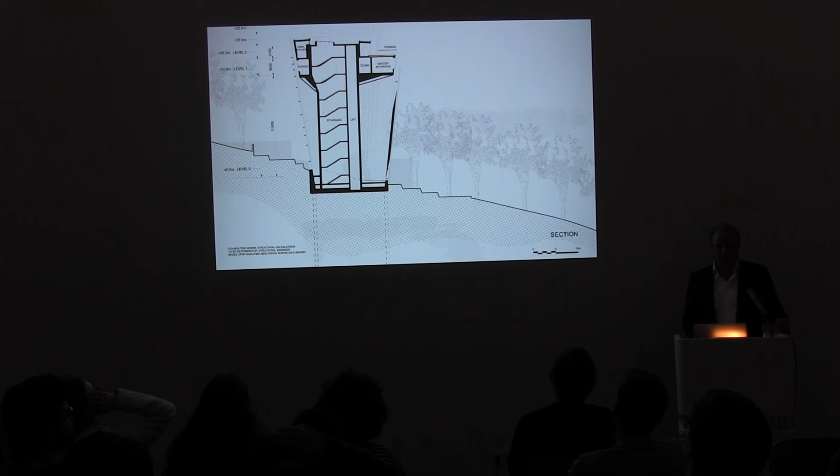So a bedroom is a bedroom, a bathroom is a bathroom. The toilet needs space, so you need shafts for MEP, for ventilation. But after all, the shape of the building is what you design, and it's your ownership, and that's what you learn here, and that's what you should produce. And of course, he was happy about this view, like the first time he can really look out. And that's how I want to close my lecture about recent projects, and thank you again for having me here.